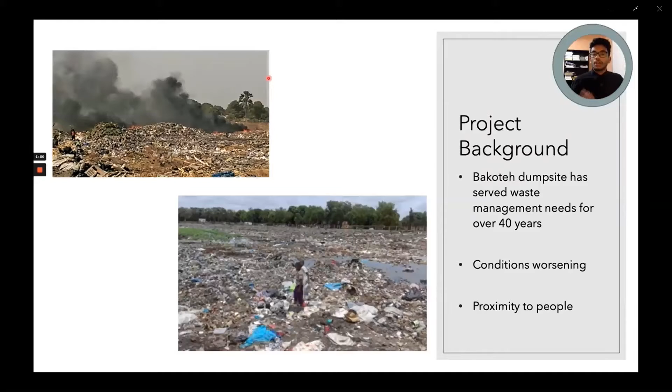Warrior's solution is to close and repurpose the Bakoteh dump site to prevent further contamination of the environment and to eliminate fire and disease risks. We have also created a well-thought-out design for a new manageable sanitary landfill with plans for incremental expansion.

The agenda for this presentation consists of plans for closing the old site, a well-thought-out analysis of construction of a new site, cost analysis, timeline for construction of the new site, and conclusion and recommendations.

The following section will describe the proposed closure process of the Bakoteh dump site and why the project is important to complete. The Bakoteh dump site borders a residential area, a women's clinic, and the Gambia's only orphanage.

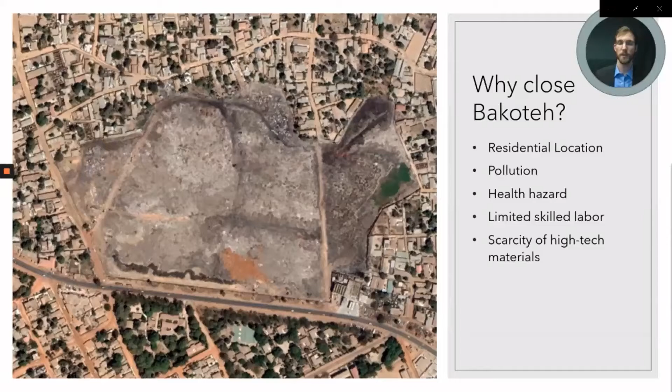Smoke and groundwater contamination have made life difficult for residents, but Warrior Consulting has created a plan that will end or greatly reduce the dump site's impact while keeping in mind the limited resources available.

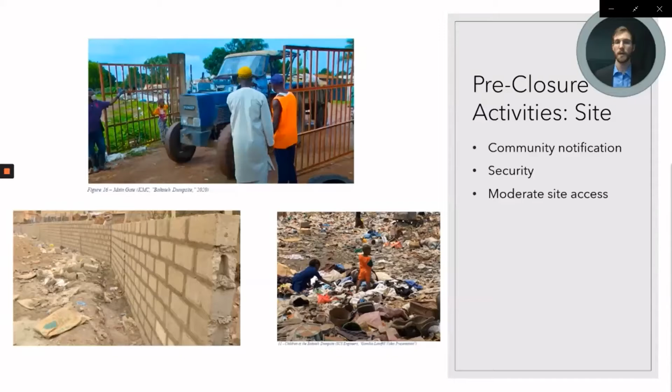There are several steps that should be taken before closing the dump site to promote the safety of Bakoteh residents. To keep people away from the dangerous machinery in the hazardous site, Warrior Consulting recommends the KMC communicate the closure plan to customers and neighbors of the site and continue using local police to regulate access.

Protected walkways and pedestrian bridges across Kotu Highway will protect children, employees, and general users as they cross the Bakoteh site. As of February 24th, the SOS Children's Village, in partnership with the KMC and German BMZ, have developed a waste management scheme designed to reduce child rights violations at the Bakoteh dump site.

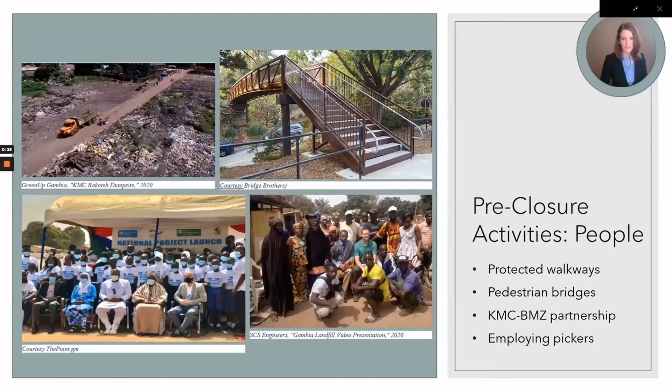The ISWA scholarship program may also be tapped to provide alternatives for the children at the site. In addition to children, there are somewhere between 100 and 300 people currently serving as the municipality's informal material recovery facility workers. Since they have already expressed interest in a controlled, safe environment, Warrior Consulting recommends that this group be trained to run the new transfer station and material recovery facility.

Closing the Bakoteh dump site will be a complex process of excavation and air and water management, but it will promote local industry and improve safety and quality of life for those near the dump site.

Warrior Consulting proposes a plan to excavate the dump site as opposed to capping it in place. We believe that the benefits of removing contamination and freeing up real estate in a densely populated and quickly growing area like Bakoteh will be worth the cost.

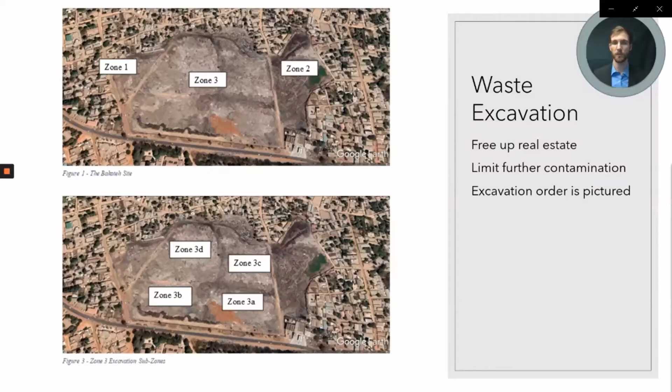Excavating will further limit groundwater contamination from the dump site and accommodate new land uses like farming developments, as well as provide a location for the transfer station and material recovery facility. The zones of the site will be excavated in alphanumerical order as shown, with the northwest zone of Zone 3 being excavated last.

The AC/PC will be the first large-scale field application of granular activated carbon in a landfill cover system. Research from Sadasivam and Reddy showed an increase in the oxidizing capacity of landfill cover soils through the addition of GAC. This additive to the temporary cover is a passive gas control measure requiring no maintenance and which will work in wet weather.

There is high potential for outsourcing the cost of the GAC through public-private partnerships or other investment. The inclusion of native grasses such as vetiver in the top layer will aid in mitigating erosion and stormwater infiltration.

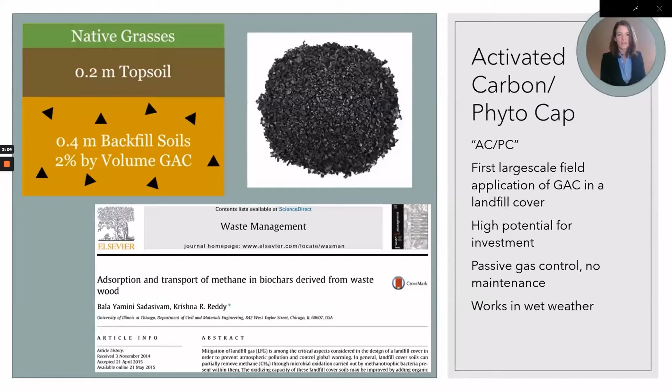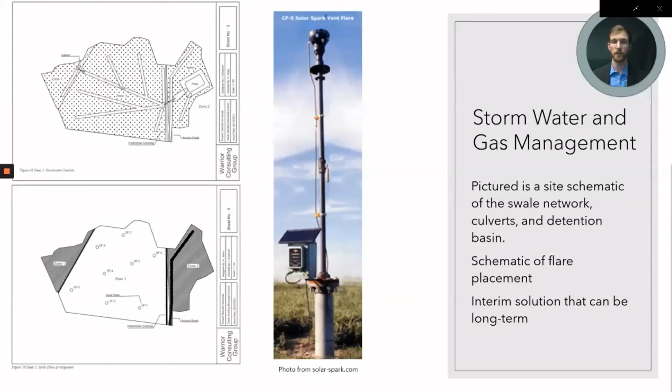An interim drainage and gas management system shall be constructed on the cap to serve during excavation. Afterwards, a similar stormwater system shall be constructed, and the vent flares shall be relocated to the new site. If the dump site mining cannot be completed, the initial system will serve as the long-term management solution.

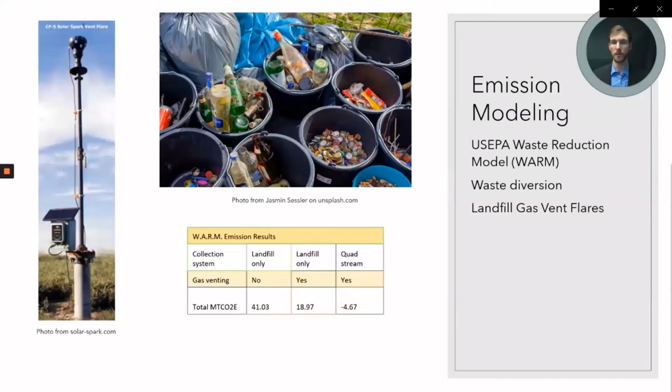According to the US EPA's WARM model, installing a vent flare system will more than halve the CO2 equivalent released, and using the quad stream waste diversion system will result in nearly zero net emissions from new waste.

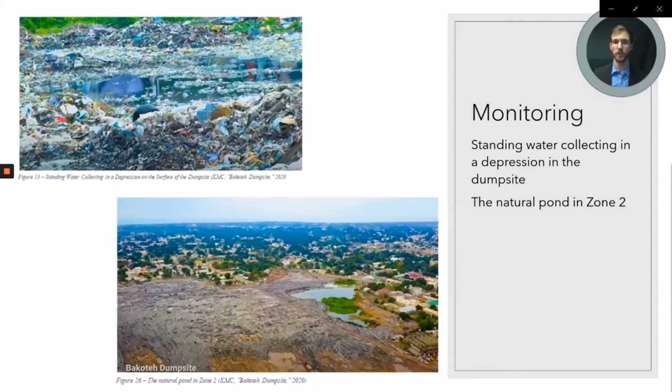Nearby residential wells will be used with the owner's permission to gather groundwater data. It is hoped that the Gambia's Water Quality Lab in Abuko will analyze the samples immediately or be able to expand its capabilities for leachate testing soon.

As previously mentioned, the primary driver behind excavation versus cap-in-place closure is the value in developing a site of this size and location.

Development recommendations were made from a nexus of industrial, financial, residential, and ecological considerations. The Warrior Consulting solution proposes developing the site by zone, providing immediate relief to the dump site conditions and facilitating gradual improvements as funding is made available.

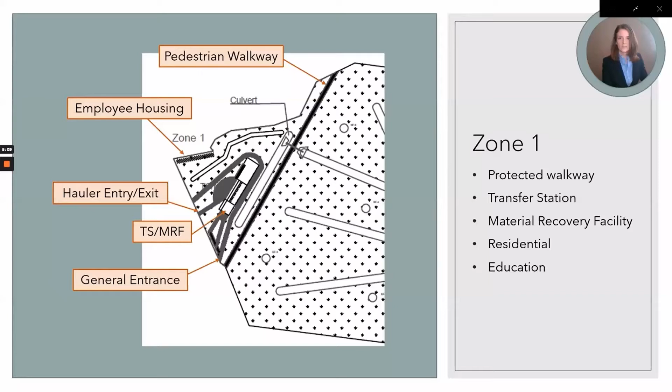The final state of Zone 1 will include the protected pedestrian walkway, the transfer station and material recovery facility, employee housing, and the opportunity to continue the existing waste education programs.

The transfer station material recovery facility design meets the KMC's waste processing needs with a low-tech design that minimizes O&M and the need for specialized mechanical equipment. The building follows EPA guidance to top-load transfer stations and is sized to accommodate a worst-case scenario where all generated waste would need to be processed by the TS-MRF before being sent to the landfill. This size is estimated to serve the KMC through 2050.

The facility itself is a slab foundation to minimize differential settlement that may occur in the backfilled material. The building structure is a prefabricated aluminum truss and ripstop nylon cover from ClearSpan. This structure minimizes construction time and maintenance costs while maximizing airflow and natural light.

With the average daylight hours in the Gambia matching or exceeding the working hours, this will minimize the need for additional electrical lighting. The airflow is both critical at the moment for COVID precautions, as well as in general for the hot and humid Gambian climate.

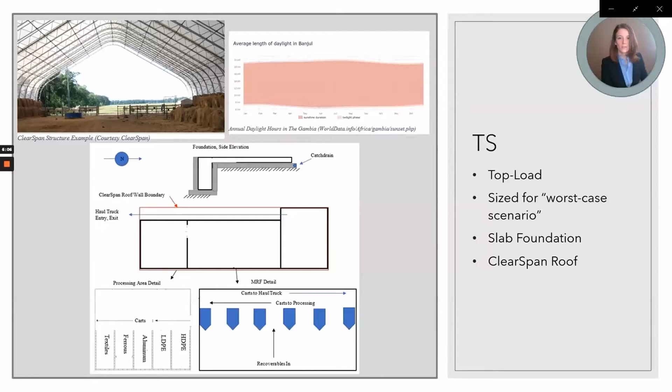The low-tech MRF is designed to push the source-separated recoverable materials through channels protecting the MRF employees, from which they can pick out and sort valuable materials. These materials will then be processed on-site and collected by local merchants. The materials collected include LDPE and HDPE, 20-gallon HDPE jugs, textiles, ferrous materials, and aluminum.

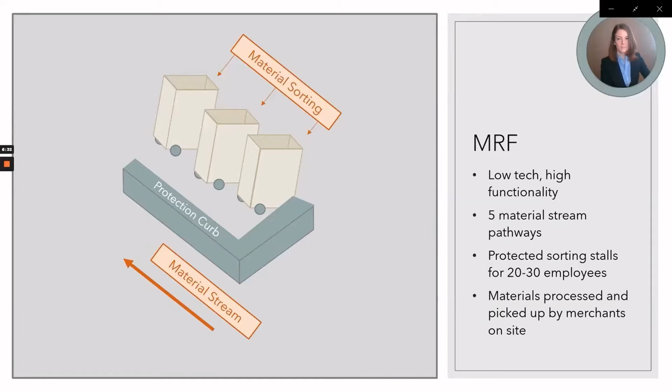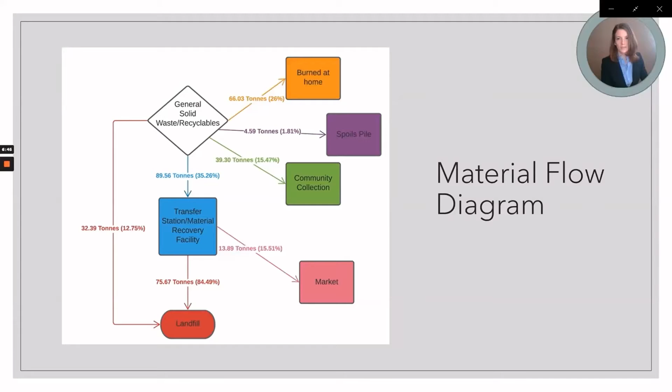The new material flow diagram details the best-case scenario management system with present-day tonnages. Currently, 26% of waste is burned by residents at home. With the KMC's push to reduce burning, the larger size of the transfer station will be sufficient to handle the additional municipal waste.

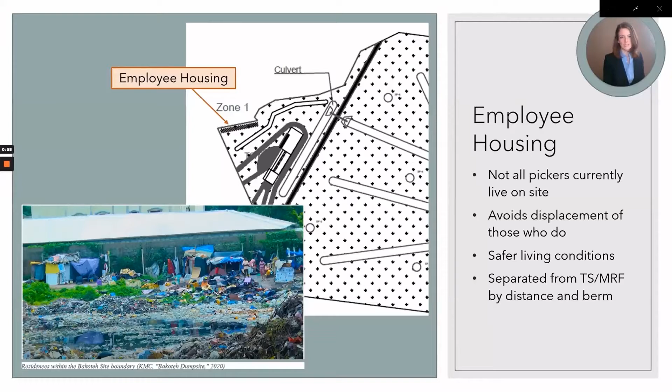Lastly, to avoid displacing the people who currently reside within the Bakoteh boundaries and to provide safer and more sanitary living conditions, simple employee housing shall be constructed in Zone 1. The residential block will be separated from the facility by distance, a soil berm, and vegetation. And as they know the residents best, the KMC shall be responsible for facilitating this relocation.

There are several proposed developments for Zone 2 after closure. The protected walkway running between the zones will be maintained after closure as a durable surface for foot traffic. Water treatments and a fountain may be used to reduce mosquito larvae in the pond.

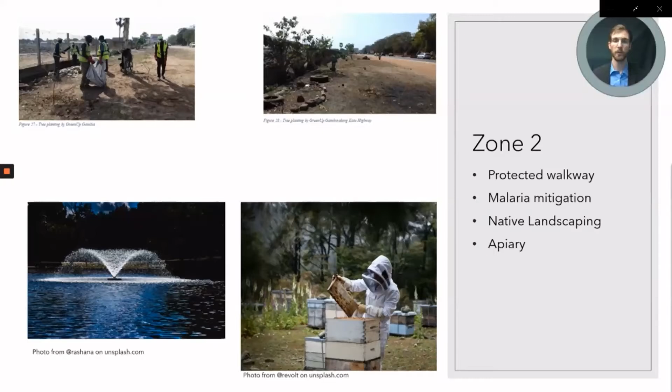The border of Zone 2 will be planted with deep-rooting trees and grasses to provide a better barrier between excavation activity. An apiary co-op will be founded to promote new plantings across the site and provide economic opportunity for participants.

Zone 3 may be used as a location to expand the apiary and will be planted with native landscaping similarly to Zone 1. It will also provide a new area for residents to plant crops.

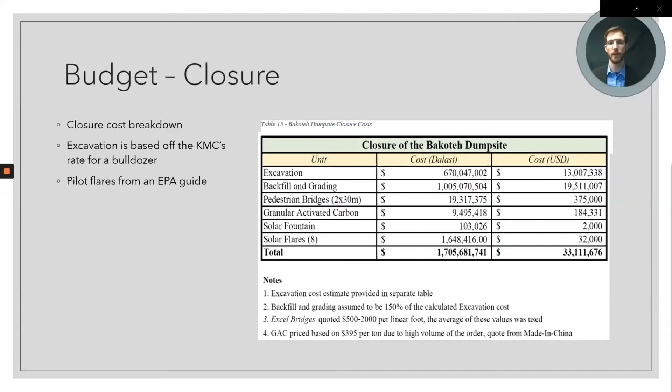A table showing a breakdown of the closure costs is pictured. The excavation costs were scaled from the KMC's current contract with the large bulldozer at 50,000 Dalasi a day, and the solar flare costs were based off an EPA guide to vent flares.

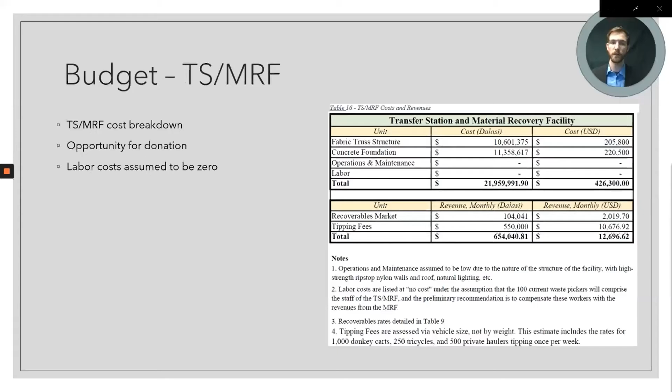The transfer station/material recovery facility represents a good donation opportunity for an international organization or firm, and it is hoped that one will be interested in donating the structure. Once constructed, the system is expected to be self-sustaining with revenue from recoverables.

Hello, my name is Brianna, and Dimitri Amroth and I will be walking you through the development of the new landfill site today. To begin the siting for the new landfill site, we first looked at the area surrounding the current dump site.

The current dump site area consisted of shopping malls, small businesses such as restaurants, and residential areas. So we knew that area in particular wouldn't work. There are a lot of municipalities all around the dump site, so we continued scouting south until approximately 25 kilometers south of the dump site, until we found a designated area that would work for the new landfill site.

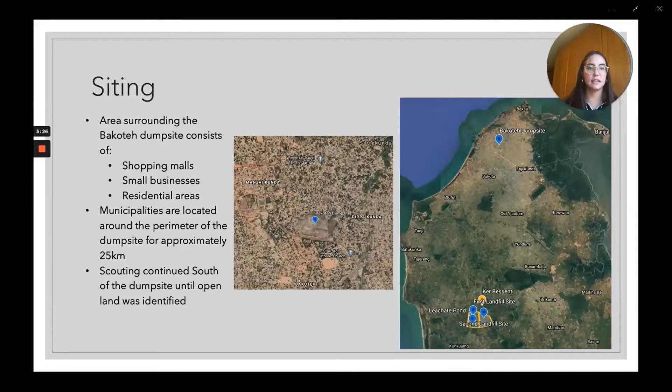The new area for the landfill site is currently occupied by farmland for the most part and a select few farmhouses, so appropriate contracts and agreements would have to take place between the KMC and these landowners. While siting for this landfill area, we paid close attention to surrounding airports, residential areas, and commercial areas, while referring back to ISWA's guidelines and often referencing EPA's Subtitle D standards.

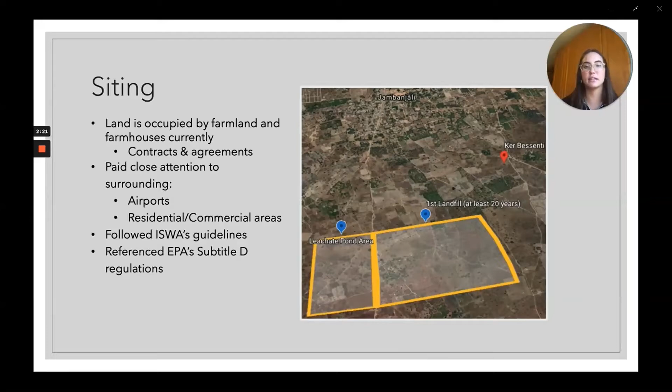While siting for the new landfill, transfer routes for the trucks were paid close attention to as well. The fastest route is approximately 55 minutes long and 23 kilometers in length. That image is shown on the left, and on the right you can see the last couple turns that the trucks would be taking to get into the landfill.

Another important thing about this landfill siting is that it could be accessible to multiple municipalities in the future, which would provide a wider solution to the Gambia.

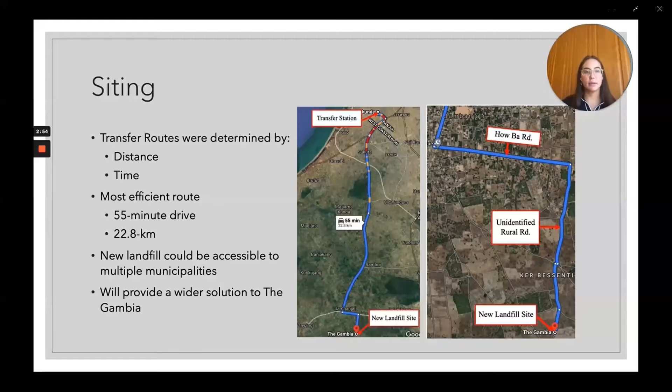Hello everyone, my name is Dimitri. I'm going to start by talking about the sizing of the new site.

The main thing is that we designed this to be a regional landfill, meaning it can accept waste from the surrounding area. We chose this because of land availability, meaning there aren't very many open spaces suitable for landfills, and because of long-term sustainability. There are a lot of other cities in the area, and they're all going to be facing solid waste problems into the future. We want to mitigate the potential use of open dump sites, and creating one centralized landfill would be the best solution. By involving the KMC in a regional project, we're able to secure more funding for equipment and machinery.

The waste volumes were calculated by the expected production rates with the compacted densities over a 20-year period for the greater area. The landfill volume and area are also made to include the fill material as well as the slope. The landfill was designed for a worst-case scenario of 0% waste diversion, meaning that if no recyclables or compost were taken out, the landfill would still be okay.

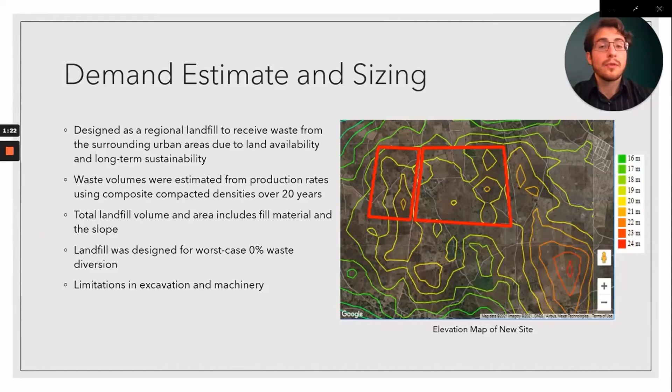The limitations we worked under were in excavation and machinery, that we weren't able to go very deep or build very high due to lack of equipment.

Now I will discuss the fluid management plan of our new landfill. Leachate and landfill gas will be managed with a passive system due to the lack of infrastructure and the costs and complications of installing and maintaining a more intensive system.

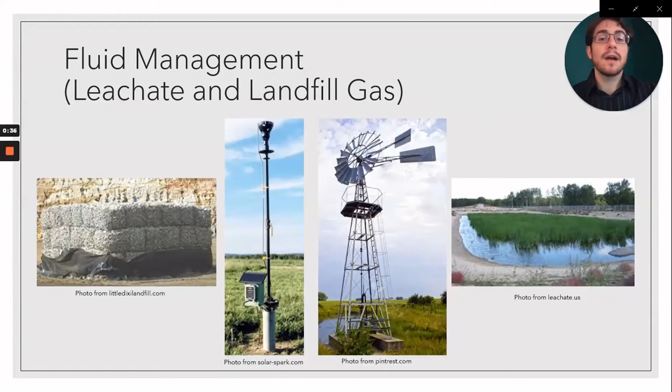Our fluid management plan starts with a vertical communication system that will link the bottom liner to the top of the landfill through high permeable pathways using gabion cubes and perforated piping. This will help drain the fluids to the landfill. The landfill gas will then be combusted using a solar flare. The leachate will be pumped up from the bottom liner and into a constructed wetland using a wind-powered pump.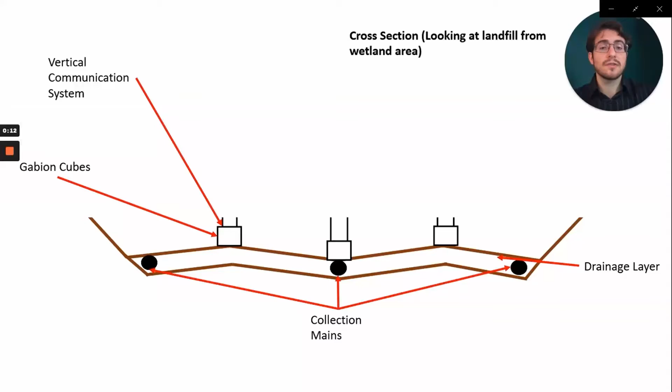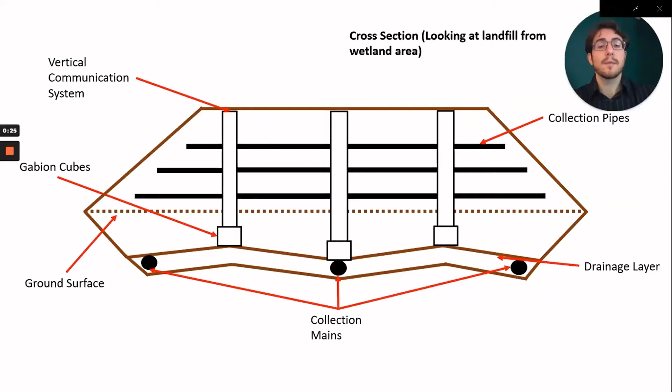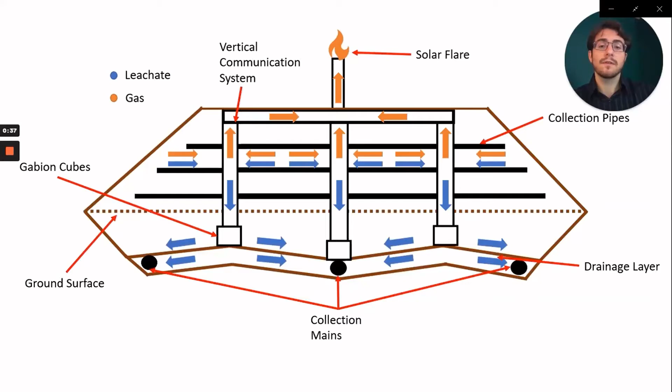As the waste mass increases, it is important to extend the vertical communication system as well as lay down horizontal piping to help create a matrix of permeable pathways that will drain the fluids. The landfill gas will be allowed to vent upwards, and the leachate will drain downwards through gravity. Once the system is complete, we can implement a solar flare that will be able to thermally combust the landfill gas.

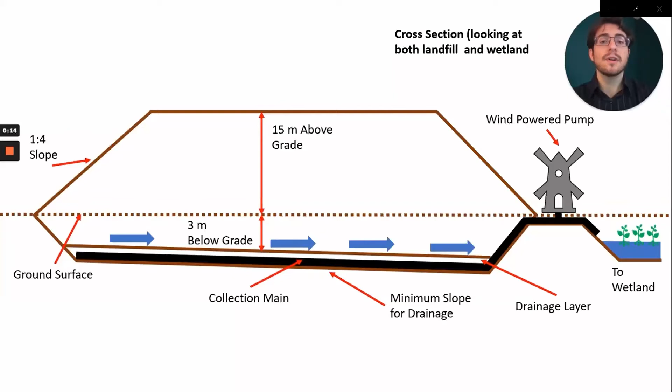Here we can see the other cross-section of the landfill, looking at both the landfill and the wetland area. The drainage layer will be sloped in order to collect leachate on one side, where a wind-powered pump can be used to pump the leachate up and into the wetland area for treatment.

This berm will be designed to retain water, but also overtop in case its capacity has been reached. We also have the option to input a pH adjusting barrier that can be replaced into the berm. This barrier can make the liquid more hospitable for the wetland plants.

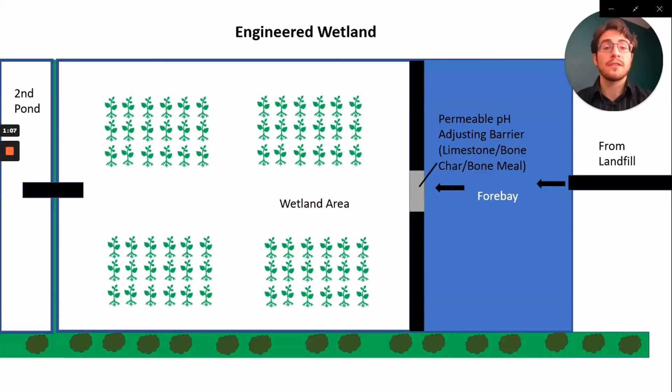Now, in the wetland area, this is where the remediation and evaporation will take place. Once the wetland's capacity has been reached, because of weather or new cells being constructed, the current wetland can be adjoined to another wetland to expand the surface area and reduce the amount of dredging. Of course, the wetland border should be fenced and, if possible, bordered by a row of trees to promote safety.

And now I'd like to talk about education and training. This is an integral part of the long-term sustainability of our solution. It is necessary not only to educate the public, but also to train skilled technicians in order to keep these systems working in the future.

The closure of the old site and the construction of the new site will serve as training opportunities to create a local workforce and create jobs in solid waste management.

The KMC and the Gambia will ideally partner with companies and universities to help provide expertise and training, with a focus on organizations within the continent to help create a network of solid waste management. Once the landfill has reached its capacity, a final closure plan will then be implemented.

A single geocomposite liner covered by geomembrane and compacted soil will be used to keep rain from entering the waste and producing leachate. In addition, we will be adding topsoil on top of the liner system to protect its integrity. The soil can then be vegetated with grasses and shrubs for stability. Since the final grading of the landfill is not steep, there is also potential use for grazing and livestock.

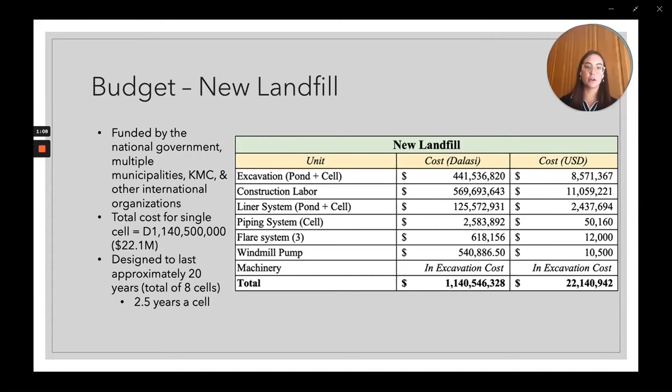The new landfill is anticipated to be funded by the national government, multiple municipalities, KMC, and other international organizations. The chart here on the right is a cost estimate for one single cell for the landfill, which is about $22.1 million. The landfill can hold a total of 8 cells, which has an approximate lifespan of 20 years—that's 2.5 years a cell. So if you times the 22.1 million by 8, you'll get the total cost for the full landfill after 20 years.

The Warrior Consulting Solution Timeline integrates construction with training and education to build local capacity in solid waste management. The integration of the closure and new construction timelines prioritizes an expedient solution to dump site conditions in combination with capacity building. The incremental closure and construction plans are designed for the initial segments to serve as training opportunities, empowering the domestic waste management industry to continue the work without international intervention in the future. This approach also alleviates the need for financing the project as a lump sum, providing time to integrate the involvement of neighboring municipalities and to secure funding from a multitude of sources.

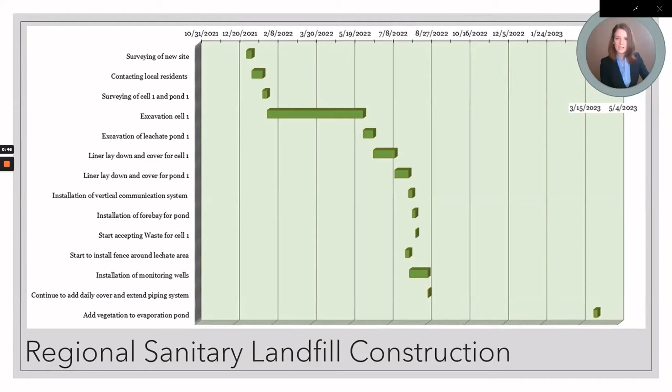The new landfill construction process will begin with the site survey in January 2022. Construction time was estimated using a 6-day work week and a 10-hour work day consisting of 2 shifts, which aligns with the current schedule for the Imbalit Waste Management Operations Team. On this schedule, the new landfill is set to begin receiving waste in August 2022.

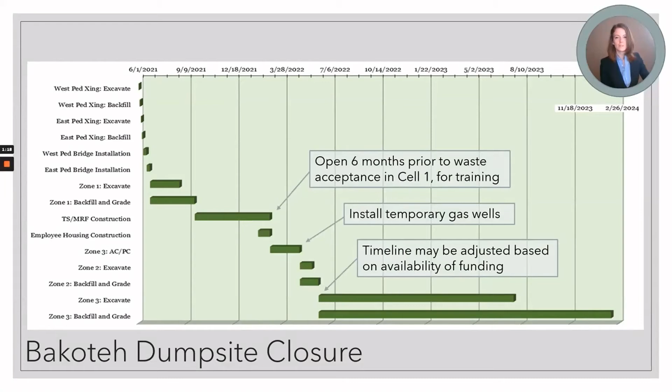Closure is scheduled to begin in August 2021, with the timing to open in mid-May 2022. This is 6 months prior to waste acceptance at the new landfill, when it begins the following August, to allow for training and education on the new system. The excavation of zones 2 and 3 is provided as if funding were immediately available. This time estimate is subject to delay, pending delays in funds acquisition.

And now I'd like to go over our conclusions and recommendations for how to best move forward with the dump site and the new landfill. For the closure of the old site, we recommend that in order to ensure public safety, improve public health, ensure safe development, and reduce long-term costs with monitoring, that the source of contamination be removed.

By using passive systems for stormwater and landfill gas control as temporary or permanent solutions, we can mitigate many of the health risks associated with the dump site. The closure of the dump site should create jobs, improve outcomes for children and waste pickers, and create an alternative structure of waste management in the area.

For the new site, we recommend that it be sized to meet regional demands. This is because it can secure more funding, make best use of land availability in the country, and provide a more sustainable solution in the long term.

For fluid management in the new site, we recommend that passive systems are used, such as vertical communication, solar flares, wind-powered pumps, and a wetland for leachate treatment. This will reduce the cost and maintenance of any new infrastructure. In addition to any infrastructure, we recommend that it is vitally important to focus on education and training. By training the next generation of workers and educating the public on solid waste management, our solution can be sustainable long into the future.

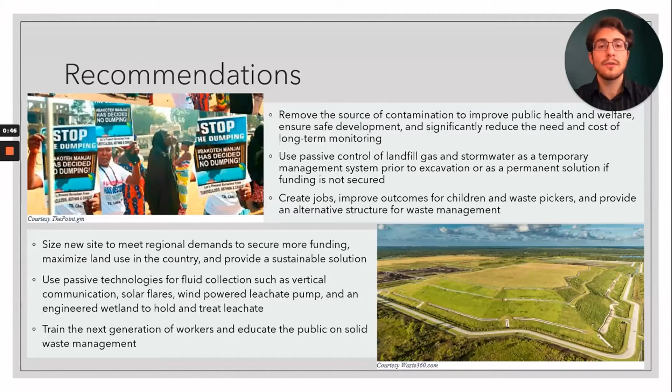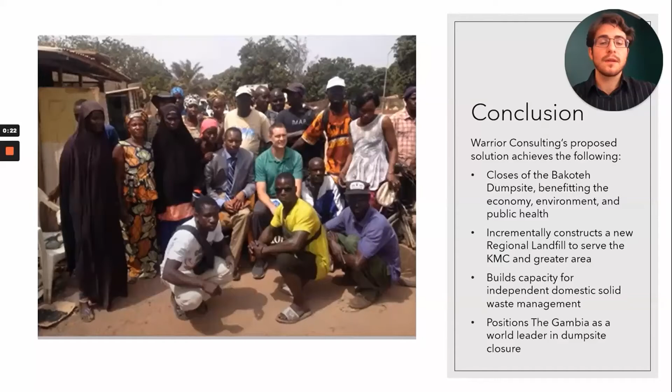In conclusion, our proposed solution will achieve the following: close the Bakoteh dump site while benefiting the economy and improving environmental and public health; incrementally construct a new sanitary landfill to serve the KMC and the greater region as needed; build capacity in the country for independent operation of solid waste management; and position Gambia as a leader in dump site closure.